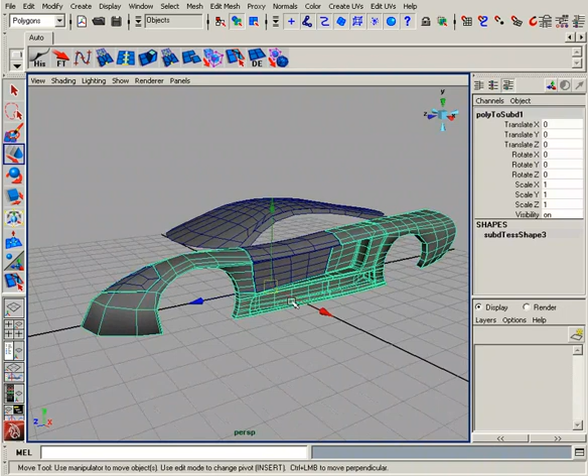In this lesson, we're going to go in and redraw some of the edges to get them ready to cut up the body piece into panels. Okay, so we've got this piece on the side. We've already cut the door out, but there are a few places that, like on a real car, you're going to have breaks in the panels. And basically, we're going to have three different places where we're going to cut this body into different pieces. So let's take a look at some of those right now.

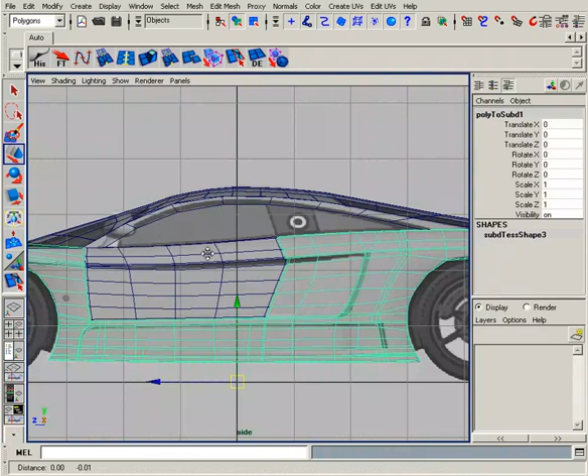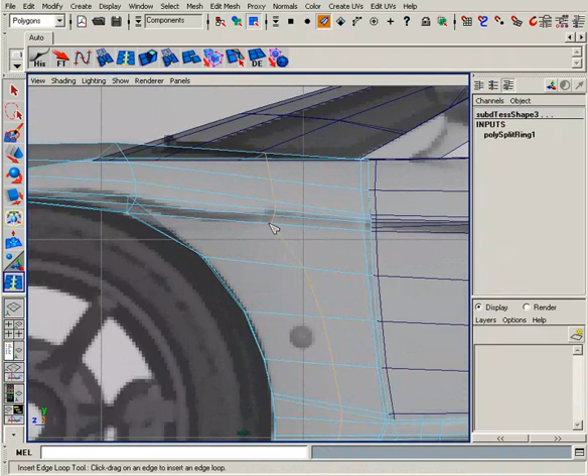The first place we're going to do that is right up here, and it's going to be really hard to see, but you can kind of tell there's a line right there. We're going to actually cut that coming back from this line right here, and we're going to cut it straight up. Okay, so first thing we want to do is add an edge right there. It'll help us see it just a little bit better. So that's where we're going to cut this, but we're going to cut it coming over from here.

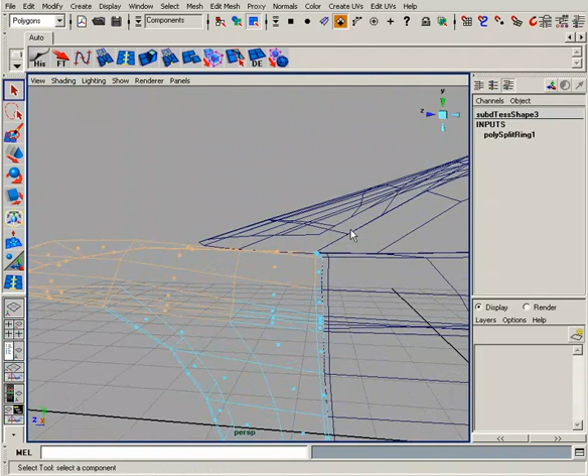So let's go ahead and check, make sure here, so you can see this a little bit better. I'm going to just select all the faces from the piece that we want to cut out. And we want to have all these selected right there. And that's basically what we want to cut out right there, that portion. So I'm just going to go up here and I'm going to say extract that. And let's see if that worked. Yeah, it looks like it worked just fine. I'm going to delete the history.

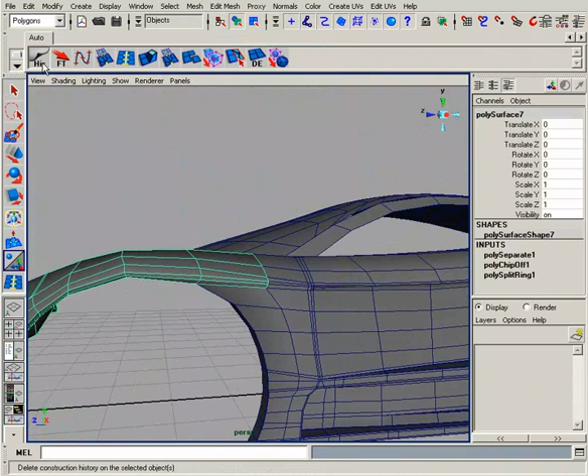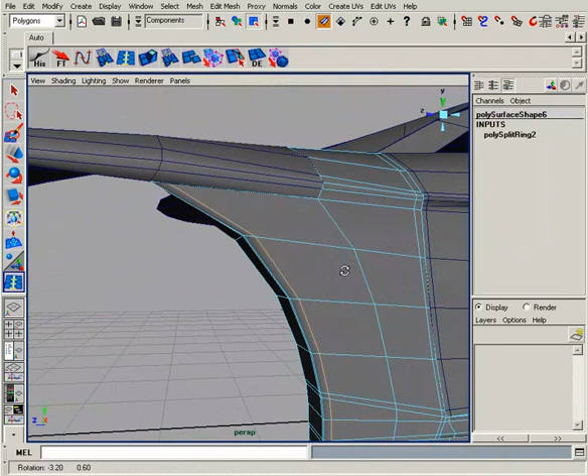Now, if we just left it like that, obviously it's going to be pretty blobby and smooth, so we need to go in here and add some edges to hold this. All right, so the first edge that we're going to add is, let's go ahead and add one right here. And I'm just going to add an edge right here. And we'll probably need one right there. And on this side, we'll need one right here.

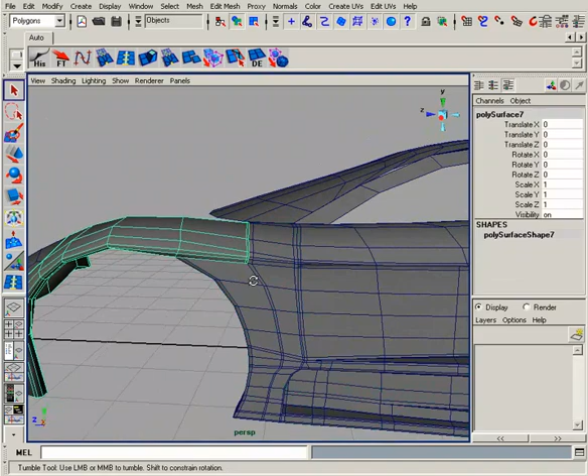And we'll take care of the rest of that when we go in and start adding the thickness to these panels. But for now, let's go ahead and delete our history. Let's leave that as it is. We've got it cut out the way that we want it to. So let's move on to the next one.

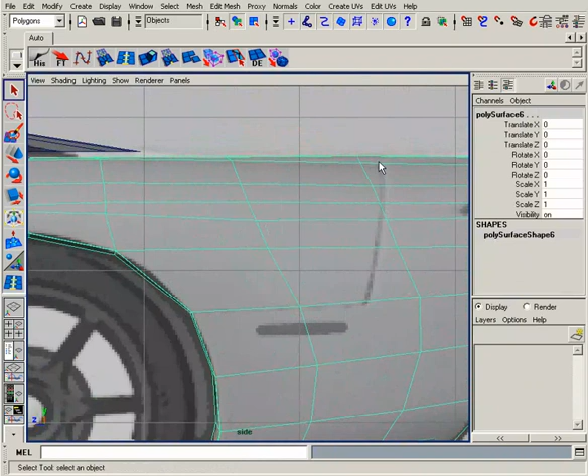The next place we want to cut out, let's go ahead and move back here to the back end. You can see this one a little bit better. You can see we've got one edge that's almost right on the edge we already have. This is basically a cut right here that comes back from the wheel arch and then goes up and over. So you can see this is pretty well defined. For this one, we've already got an edge right here. It's just angled a little bit wrong.

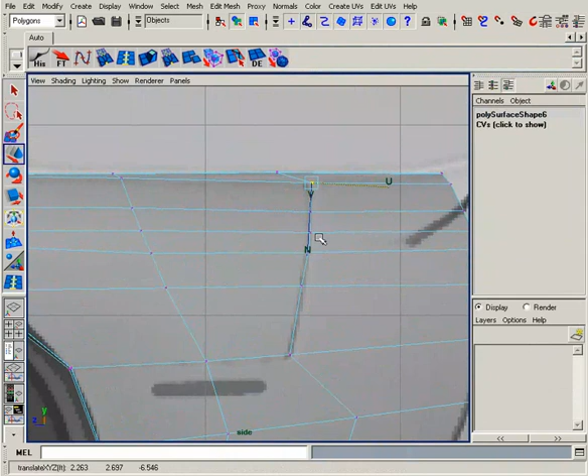So I'm just going to go in here and we're going to move these points kind of into position, much like we did when we were drawing our lines out to extrude the scoops and the doors and things like that. So some of these are pretty close. Some of them need a little more movement there. So we're just going to draw those into position, trying to get as smooth a line as we can here.

And go over to the top. That one's in position. And I'll just grab that one. For this one, I'll just use the world. Move it straight back. Curve it up a little bit. Alright. So now we've got these faces defining this cutout.

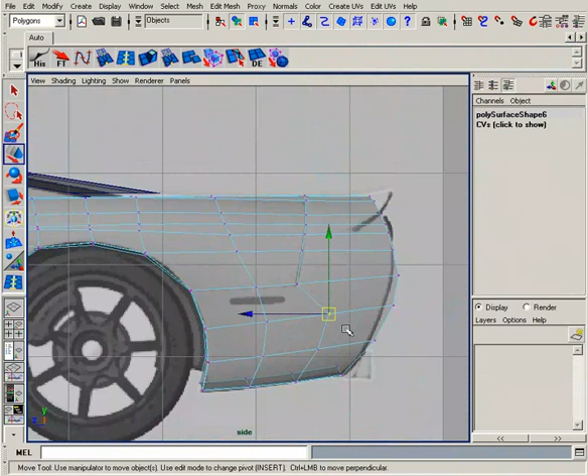So what we can do is select all the faces that we want to extract here. I'm going to select the extra and then deselect this for the cut. Checking our perspective, you can see that this is where we want to cut out. So again, I'm going to go up here to Mesh and I'm just going to extract those faces. You can see now, I'm going to delete my history here.

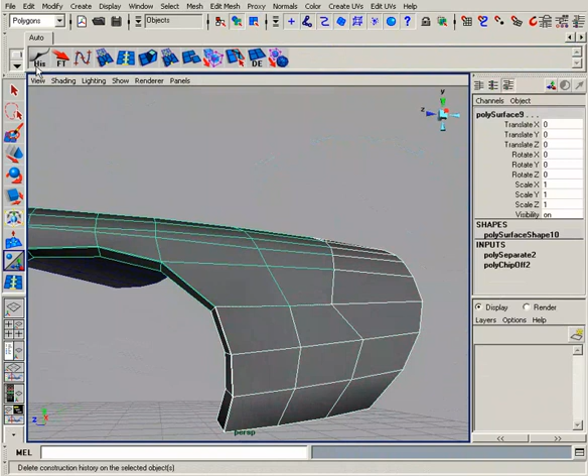And we're definitely going to need some more edges to maintain that, depending on how smooth we want that to be. Let's go ahead and take a look at how smooth that is. It's actually pretty sharp, so we're going to need an edge, maybe like right here, possibly right here, to actually make that corner. And because of that, we need to match that up on this side.

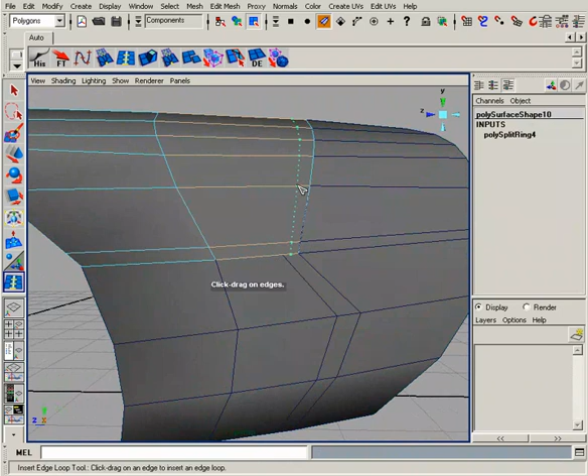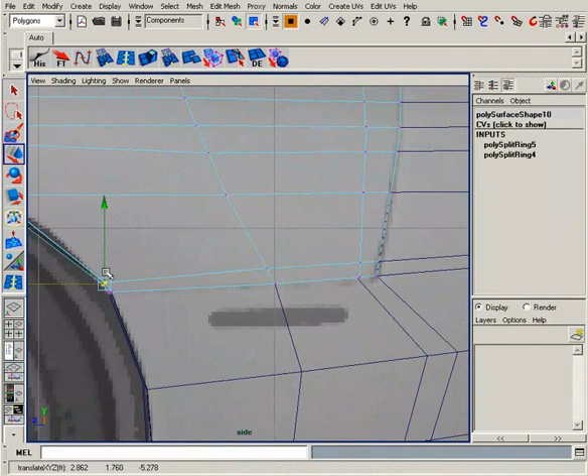And that means we need to go in here, our side view, and just grab these vertices and just try to use those to smooth this out a little bit. Okay. We'll actually want to keep those. We can use it. We can smooth it out a little bit, but we probably want to keep those down closer to here because we're going to use that to help create this sharp corner here where these meet. Okay. So we don't want to space those particular vertices out too much because they will be useful down where they are.

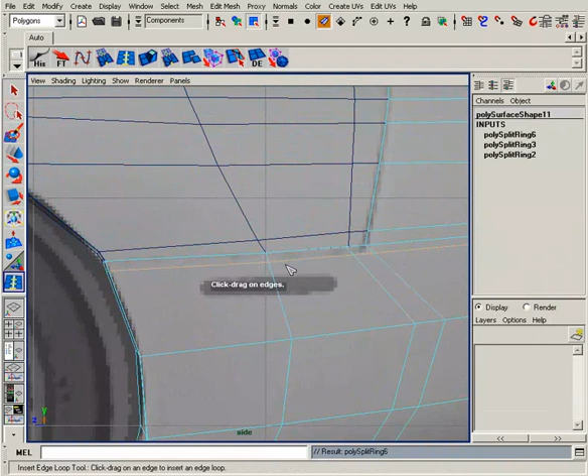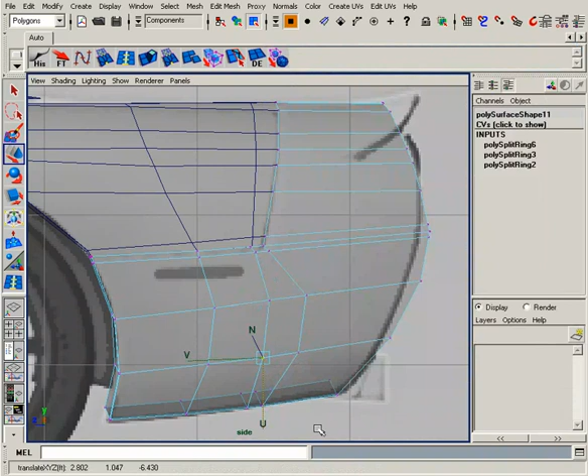And let's do also one right down here. There we go. And I'm just going to space these out just a little bit along the move along normal and get those just spaced out slightly. There we go. And we'll probably need to add a few more edges, but like with the other one, we'll get to that when we go to add the thickness. But to this point, we've got it cut the way we want in the piece that we want.

Now we got one more cut to do, and this one is going to be a little bit trickier. You can see right here, we've got a line going from this wheel arch, curves up, goes horizontal, curves up again, and goes at an angle up over the top part over to this belt line. And it cuts across this character line here. So it's going to be a little bit tricky, but you can see we have the resolution there. So we need some resolution here to create this curve.

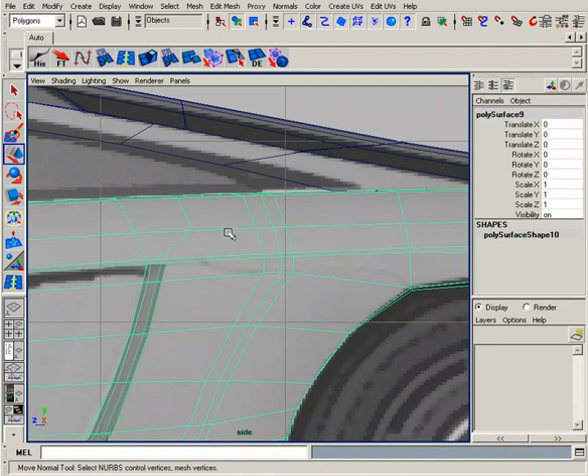We already have these 3 points right here. So we can use these at this point. We just need to move them over. So we can either move them over or we can redraw. But we know that they're going to end up having to go all the way over here, and we've got these guys in the way. So let's start at this side, move everything over past this line, and then we'll be able to redraw that exactly where we want it.

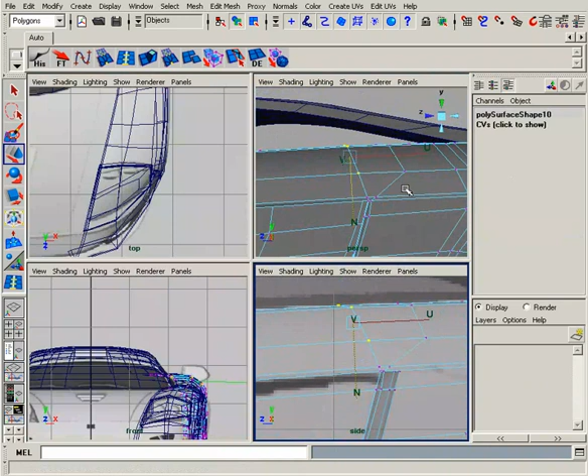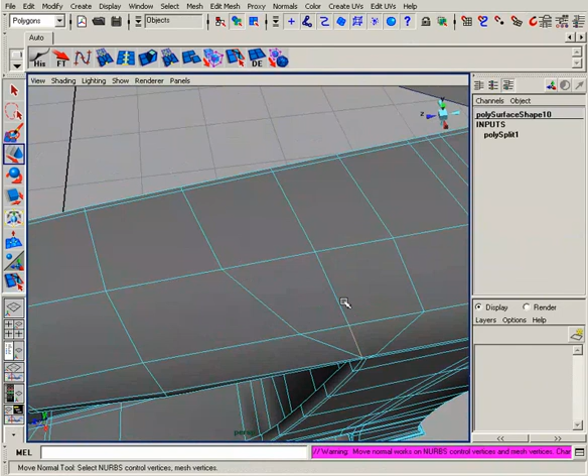So let's start the farthest point, and we've got these guys. I'm just actually going to redraw these. It's going to be easier than having to worry about keeping that curvature. So I'm going to just select my split polygon tool. I'm going to start at the point that I want to keep and make sure that I'm far enough over, and then I'll just redraw that up here. Okay, and then I'll just select the edges that I don't want and delete those.

And now I need to do the same thing with this guy. I'm going to start it down here at this point. If I can get down there. Right there. And space it out a little bit, still staying on the side of where we're going to have the cut. And just pop that over there onto that line and get rid of this edge over here by selecting these and just deleting that edge. So we've moved those out of the way now.

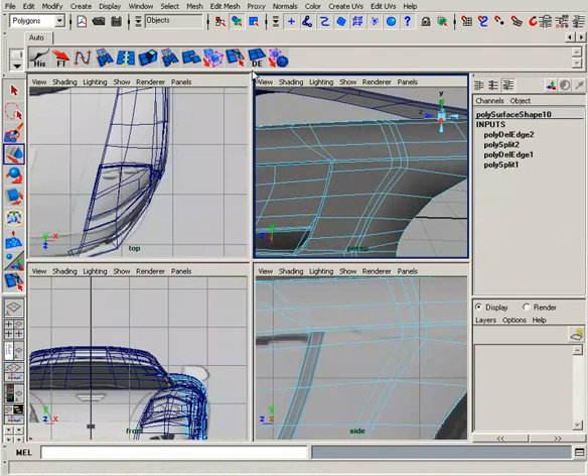So now we need to figure out how to move these guys over. So we can do it one at a time by drawing. Let's go ahead and do that. Might be a little bit safer than trying to move all those points at once in that direction. So I'm going to find a point where I think the geometry is fine. It's going to be right there. And this is going to be, let's say, right along here. And I'm just going to draw up kind of on the side of where that point is, where that cut's going to be.

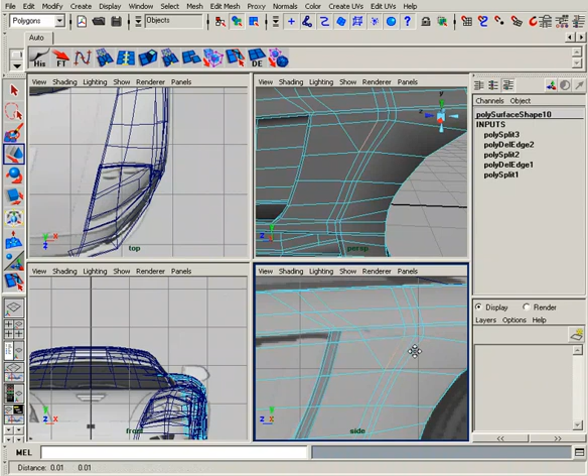And this is going to also serve to hold our geometry when we smooth it out a little bit. And now I can delete these faces here, or these edges rather, by selecting those and deleting those edges.

Then we can do the same thing with the middle edge, and this is going to be the edge that actually defines where we cut this guy. So I'm just going to go right up here and draw it right along there, all the way over to the side where we were. Okay, and now I can get rid of these edges.

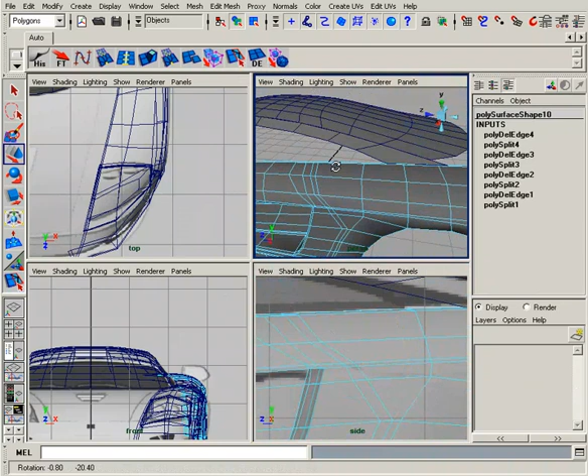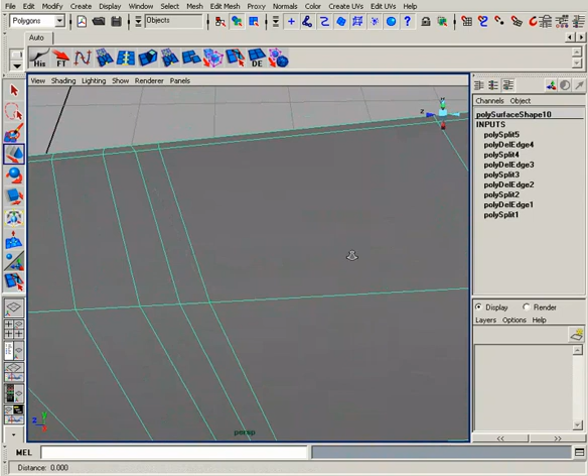And then we just have one more to do. And this one I'm just going to draw right on the side here. Just follow this guy. All right, to the edge. There we go. And if we want to, we can go ahead and move some of these. I'd like to keep this indentation here, and hopefully that'll be okay.

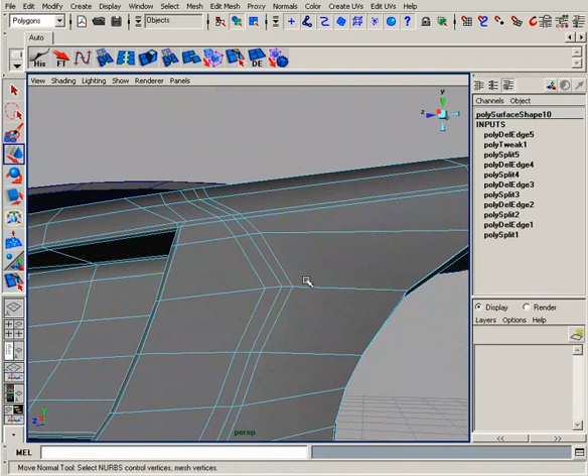I'm going to just grab those edges that I just rerouted and delete those. And if you want to, you can go ahead and pull these guys over just to smooth things out a bit and make the topology a little better looking. We can go ahead and smooth all these out a little bit later if we want to. But right now we're concerned about having this geometry right where we want it. So let's take a look at what else we need to do.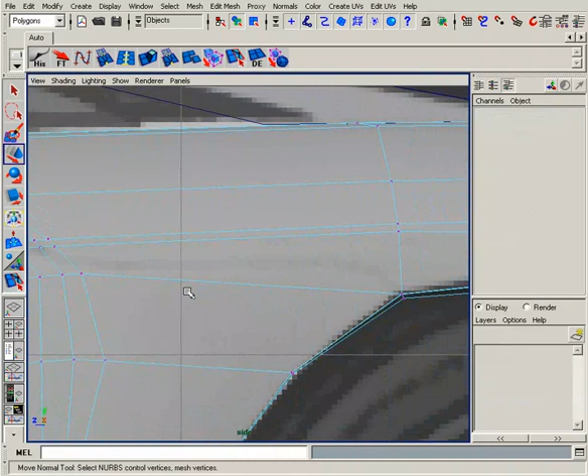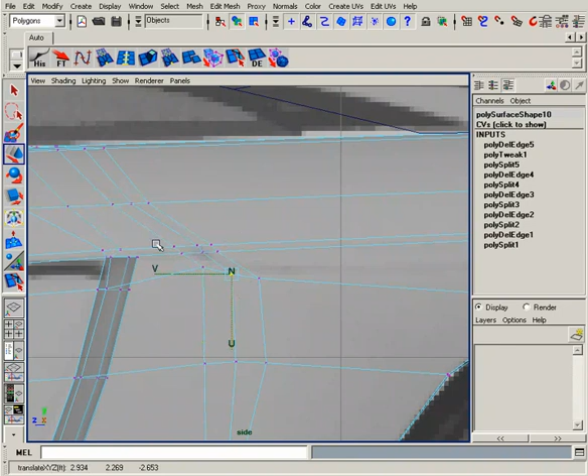All right, so this edge is pretty good. We just need a little bit more resolution there. Pull this guy over. Let's pull this guy over and up a little, and then let's pull this guy up. Okay, so you see what I'm doing there. I'm just drawing that curve out. We'll actually use this guy as the cut line, I think. So we can move this over a little bit, just so we can have enough resolution there to create that curve.

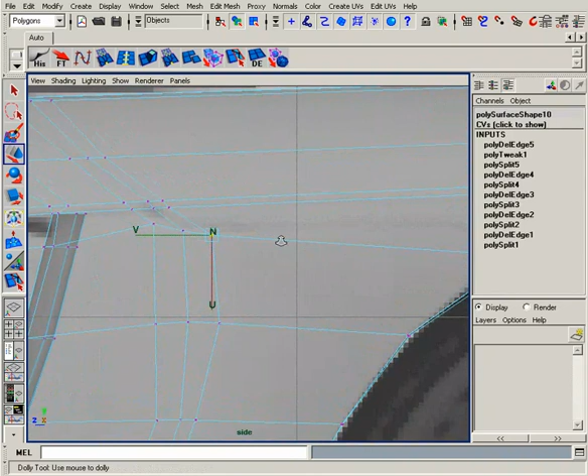Okay, and now let's go ahead and add some resolution here for this guy. Now we need an edge to hold this smoothness or the sharpness on this wheel arch. So we can use this edge for kind of both duties here, for both jobs. We'll insert one right here along the side here, and that's going to hold this edge where we want it.

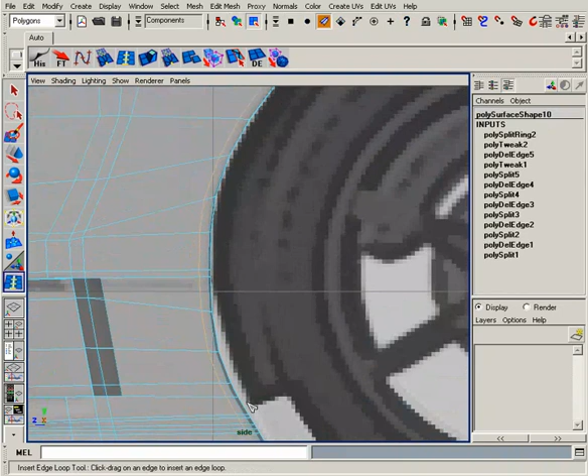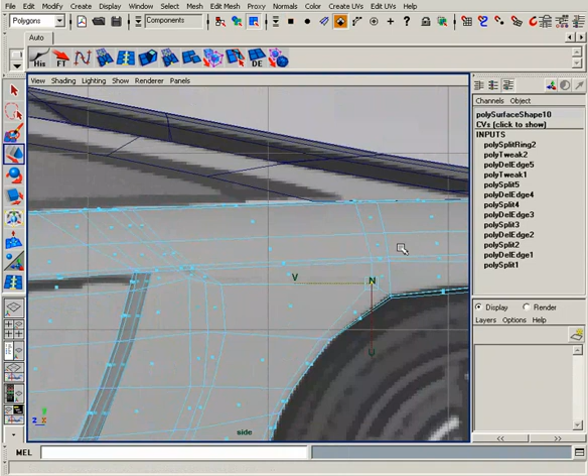And now we've got this point right here that we can use to actually create that curve there. And we know that when we smooth it, that's going to curve out. It's going to smooth out, so we don't have to worry about that sharp edge since we'd only have one. Okay. All right, so let's see how that looks. Let's go ahead and select all of our faces that we want to extract here. Shift select anything that I don't want selected here. Let's see how that looks.

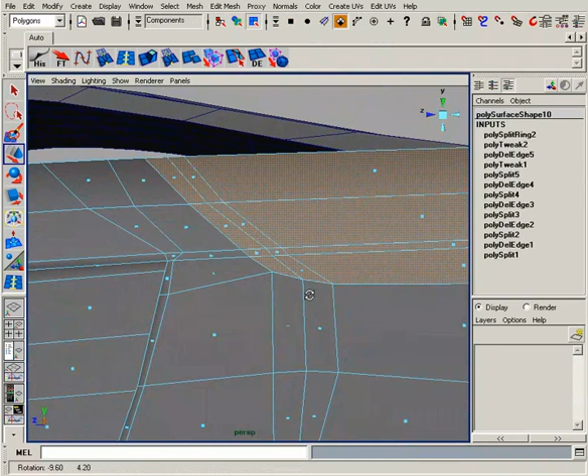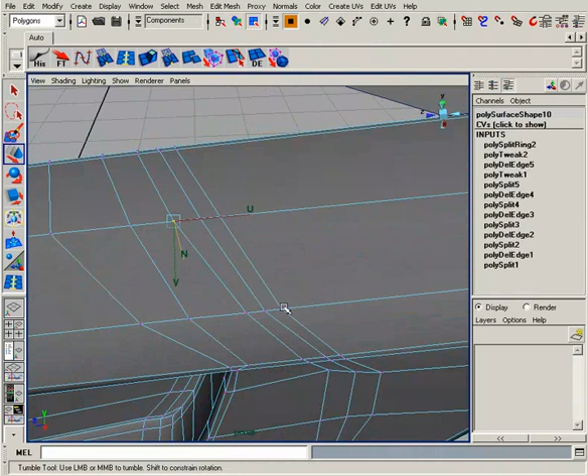I think I'm going to go ahead and just use the original plan of using this one, and then we'll be able to use this edge to kind of make that nice and sharp. Okay, I'm going to go ahead, and before I do that, looking at this, it looks a little bit like we could make that curve a little bit nicer. So I'm just going to pull this over slightly, just like that. And now let's go ahead and cut that piece out.

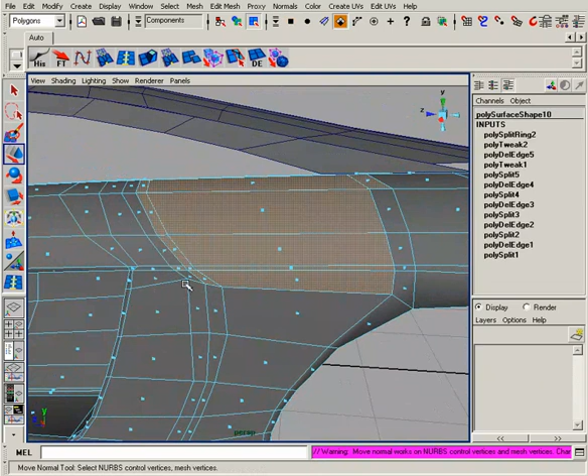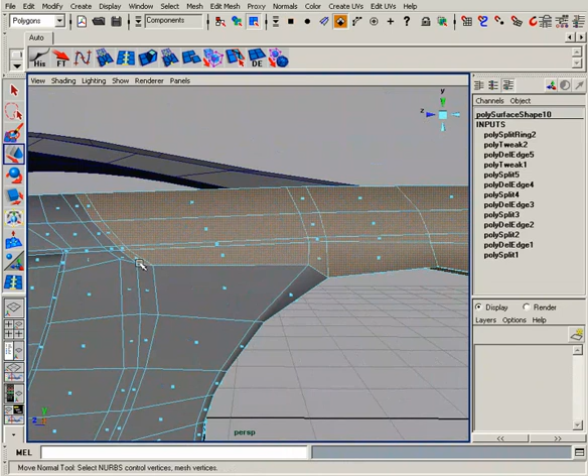So I'm going to go back and select those faces. I'm going to leave off that first row and just select the rest of our back end here of this panel. And don't forget these guys up here. Okay, so I've got this nice line here, and I want to make sure that I don't have anything else selected. Oh, like those guys. You want to wireframe once in a while and check, make sure that's all you've got.

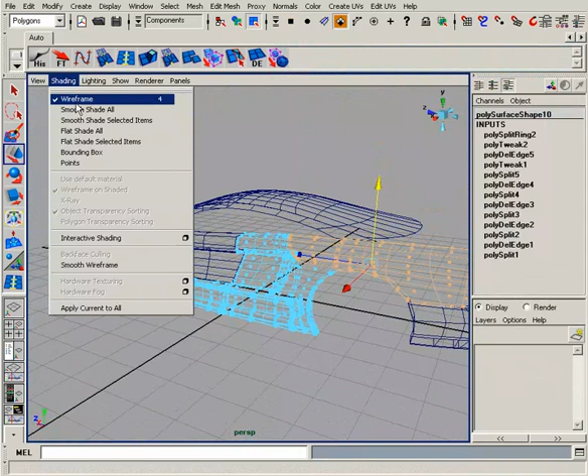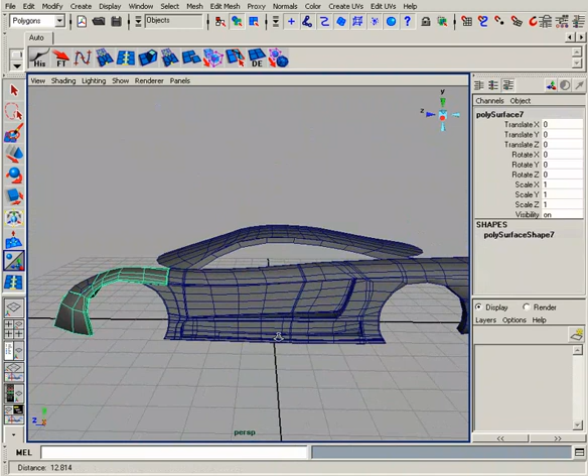Okay, now I'm just going to extract that. Mesh extract. And now I don't have to go in and add edges at least along this part. We'll probably still have to add a few edges to get that looking the way we want, but at least now we have our separate panels cut up and ready to go, so that in the next lesson we can come back in and start adding thickness and extruding edges and getting those panels to look like they fit together. Okay.